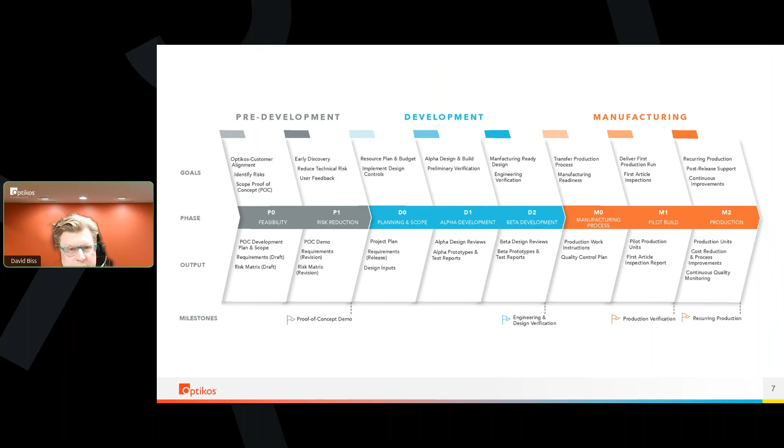So I would take this development roadmap and break it into three rough categories. In the early development, when we're developing specs, maybe doing our preliminary design: what am I going to measure during my prototyping and manufacturing?

And then when I'm doing my design work in preliminary and critical design, you want to start thinking about how am I going to measure this? What tools do I need to have on hand? What tools do I need to create?

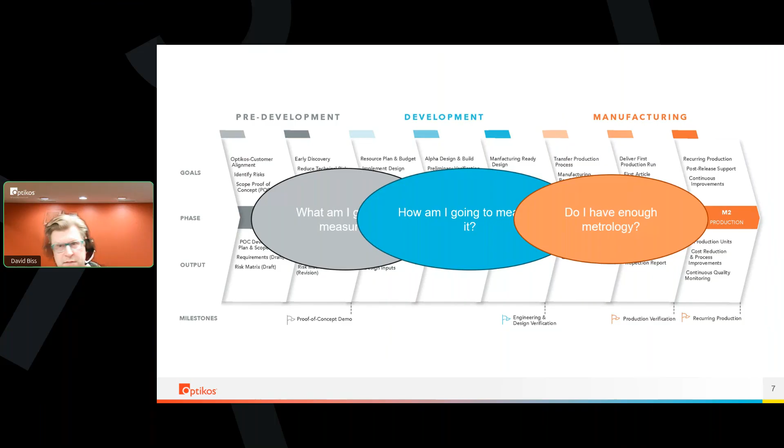And then when you make the leap from development into manufacturing, you're going to want to start thinking about, do I have enough metrology? Do I have too much? Do I have the right mix of metrology for my manufacturing process?

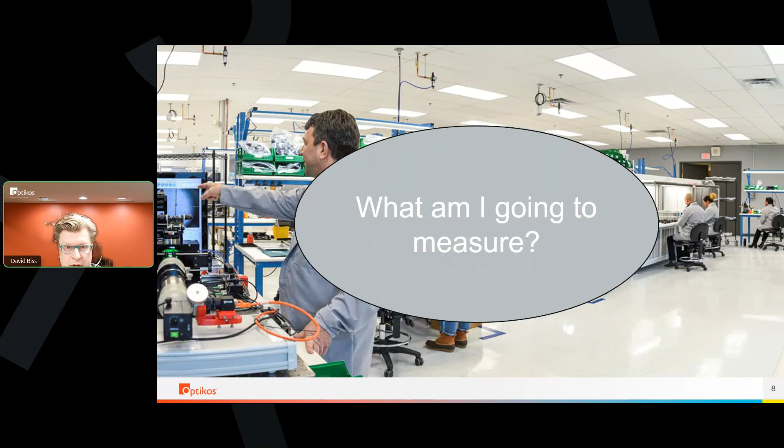Now, with that, I'd like to talk about the experience we've had at Optikos and our customers have had with what am I going to measure. I'd like to start that off with a quote, really a comment or question I had received when I was giving a talk where I had talked about determining metrics for system performance.

Someone commented that we've run into a problem multiple times where we'll build an optical system, we've done all our development, we'll test the system, and we'll find out the performance is lousy. Then you have to go through a lot of pain and do a lot of troubleshooting.

They figure out that a subassembly in their system, about which they had made a lot of assumptions, and in some cases it makes sense to make those assumptions, they assumed it should perform at some level, and it turns out that it doesn't perform at all to the level they were expecting. And so that ties into what should I measure? Clearly in the case of this quote, they should have considered measuring this subassembly in the system.

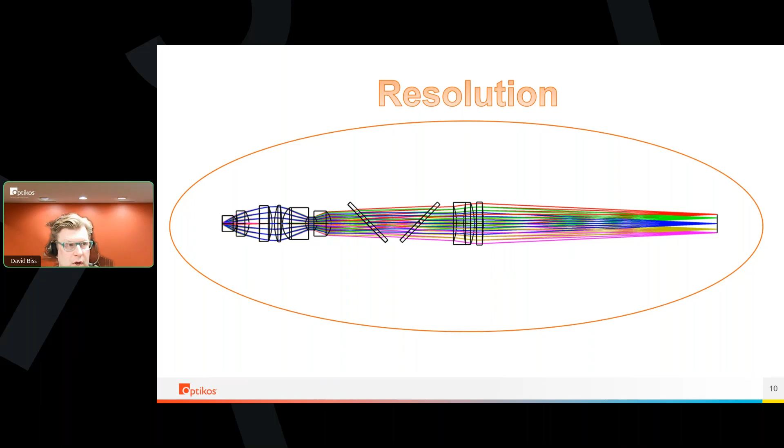I could take an example of just a simple microscope lens design that I have up on the screen here. I think everybody would agree that for a lot of microscopy applications, resolution is the key thing people are interested in. How well can you resolve these small features? But leading up to this final test of resolution in the system, you're also going to want to consider testing other parts of this assembly.

You may want to think about, well, how am I going to test this objective? Or what about the microscope objective would I want to test? Do I want to look at wavefront? Do I want to look at MTF? Do I want to look at some other parameter, field of view, focal length? There's transmission. There's a lot of different parameters you can think of.

And along with that, you can also look at the tube lens. If you have an objective tube lens pair in your microscope, you're going to ask a lot of the same questions.

Do I want to measure wavefront? Do I want to measure MTF, transmission, other things? And then other components in the optical assembly, you're going to say, if I have beam splitters or dichroics in the path, do I want to look at the transmitted or reflected wavefront of these guys? Do I want to look at spectral transmission to make sure the right spectrum is passing through the system?

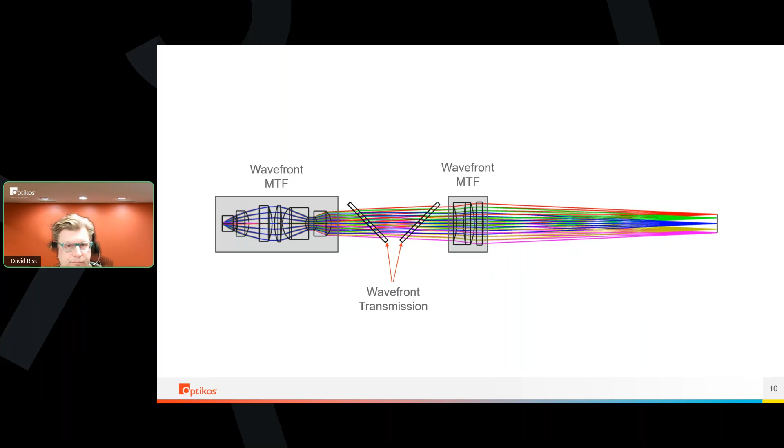Now, if we want to think generally about what I'm specifically going to measure in an optical system, I think there's two ways to look at it. There's a very straightforward, simple set of metrics or specifications or things about the system that you would want to measure. And then there's another layer that's a little more complex in terms of looking at system metrology or subassembly metrology or component metrology.

When we think of what I'm going to call simple metrology of a system, if you had a lens assembly and all the parts in front of you on a table and you say, hey, what metrology are we going to do? I think this is the first thing everybody would think about. We have mechanical components, so we can measure the mechanical dimensions of cells or barrels or retainers or the fit of the retainer. And if we have lenses, let's think about the center thickness, the clear aperture diameter, the radii of curvature or surface irregularity.

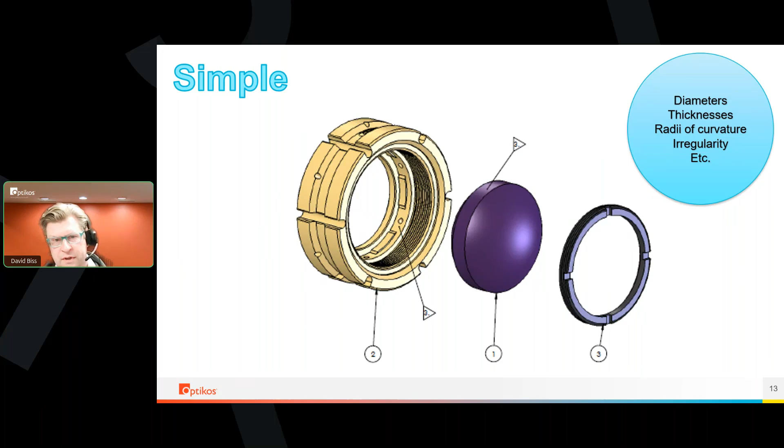And those are all valid things. You want to do incoming inspection. You do want to measure these different components. If we take it a step further and think about a more complicated second layer of metrology, if I take these individual piece parts and put them into an assembly, we want to start measuring those subassemblies to verify that those components are actually assembled correctly.

So we start to think about subassembly performance, and this would be in the case of what I was showing a few slides earlier. You're talking about your objectives or your tube lenses, and with that it becomes a little more difficult to say, what do I need from these different components to achieve the performance at the end of the line? In terms of the microscope, what kind of wavefront performance do I need from my objective to achieve the resolution that I expect?

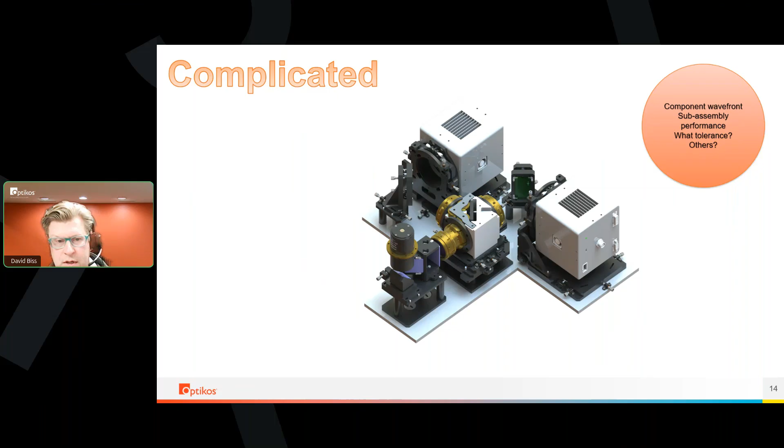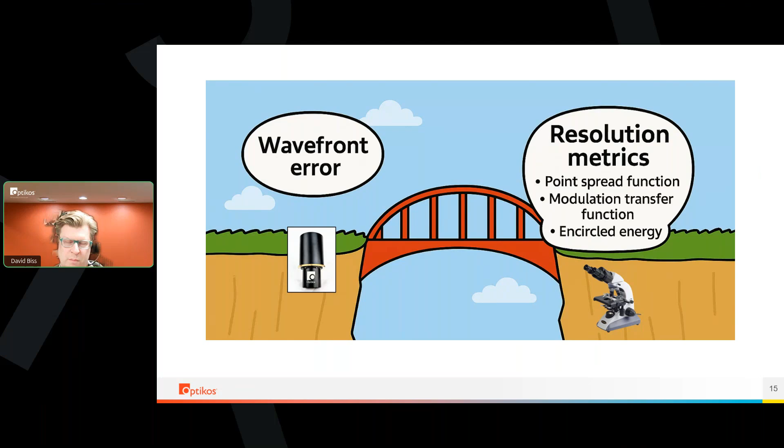There's sort of a separation, I'd say, between this component wavefront error and resolution metrics. I'm keeping with this microscopy theme, but it can be applied to optical imaging applications and other applications. If you're just delivering light in an optical system, there's analogs. We have our end system metrics, but then we want to know what performance we need out of these different components.

We want a nice high resolution image, or it doesn't have to be high resolution. It just needs to be achieved against whatever your imaging criteria is supposed to be for your system. What kind of wavefront error do we need from an objective, and how do we bridge this gap?

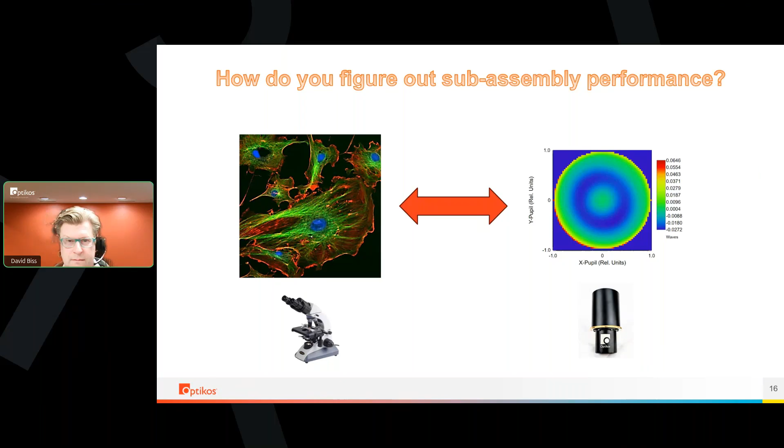So when we're thinking about metrology, we need to come up with these answers, because if we're going to measure a subassembly, we want to know, if I measure 10 waves, is that good or bad for the objective? Or do I need to measure a tenth wave of peak-to-valley wavefront error? And you can do that during a design phase by coming up with a tolerance analysis to bridge this gap.

You sort of feed in your nominal design, you have your tolerances of all your piece parts, and the tolerance analysis generally takes all that and perturbs the optical design to generate a statistically significant amount of Monte Carlo trials. And then you can look at those outputs and say, oh, great. Now I have a relationship, and that's what that plot on the right is, the output. It's a representation of all these Monte Carlo trials. You have a relationship between your full system performance and your subassembly wavefront error.

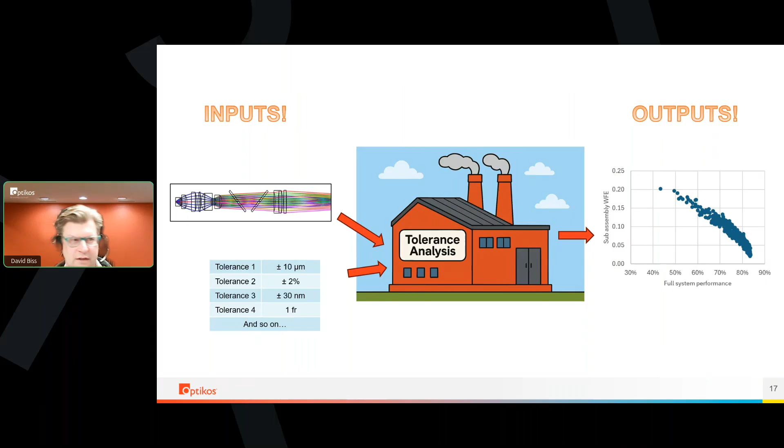And so you can take that and start to use that to come up with performance targets for your metrology system when you're doing your design, because you don't want to be at the end of your development and say, okay, well, my system doesn't pass, and then you start measuring things and you're like, well, I don't know, this tube lens has this wavefront error. Oh, now I need to go do that analysis and figure out what it was. You want to do it back in the beginning when you're doing the development, because you can also feed that back into the development to help you design better.

But data like this helps provide in-process performance targets to help you build confidence that when you build these components and you get to the end of your assembly, you're going to have a performing system. Also, in a production setting, or when you're doing prototyping, if you start measuring something and you see it doesn't pass, it's not meeting the specification, you can halt your process right there before you get to the end of the road and say, hey, there's something wrong with this component.

Either there was an error in the assembly, or there's a non-conforming part that maybe you missed in an inspection step, or maybe you didn't consider measuring that because you had high confidence that that performance spec was going to be achieved in inspection. So this data can help you catch those things early in the build process, or at a point in the build process where it doesn't affect the end result, and will result in saving you time and money. It also gives you the chance to rework components and feed them back in so that you build a system that will perform to your expectation at the end of the build.

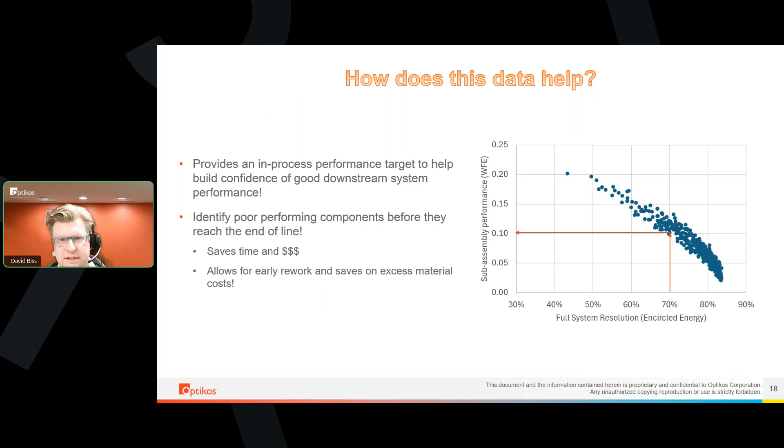So if we're thinking about this, what am I going to measure? And we're thinking about metric targets for metrology. You want to do that in early development phases. You want to do that because it helps you determine what tools you might need, but it also helps you build this metrology foundation that'll support a well-performing system at the end.

When you think about metrology early on, you can immediately think of, okay, well, I'm going to measure piece part components, and I'll measure mechanical dimensions or lens parameters of an assembly. And that is something you absolutely should do at an incoming inspection. But it may not be as obvious that, if you're building subassemblies, if you have an optical relay in the system, you will want to figure out what about that relay is worth measuring so that you can yield an appropriately performing product or prototype at the end of your build phase.

And in the design phase, you can leverage the design and modeling work to answer those questions, figure out what metrics you're looking to achieve when you do your metrology during your prototyping phase. And specifically, tolerancing analysis is one example of something that can bridge that gap between final system performance and looking at design files and say, okay, I know that for this statistical ensemble of systems that have this kind of performance, I need this kind of performance from your subassembly.

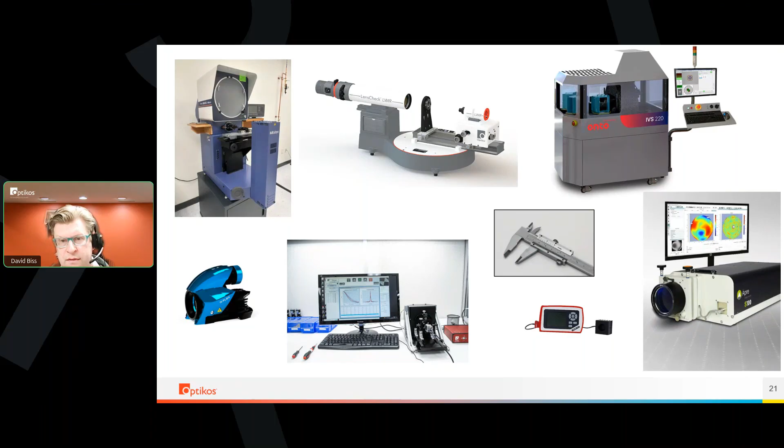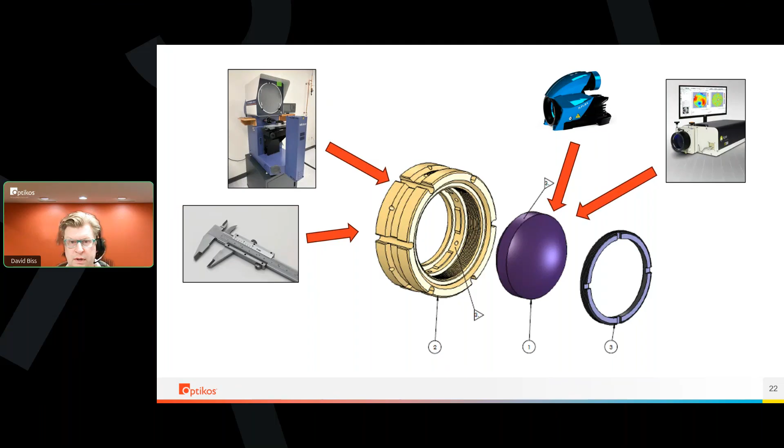Because you can do a lot with these kinds of off-the-shelf things, and you can do a lot of component measurement in a straightforward manner. But once you get past component measurement, when you get to your subassembly, you can do some analysis or some metrology on it with off-the-shelf tools. But if you're talking about subsystems or other things, you may not have a tool that measures what you're looking for very well.

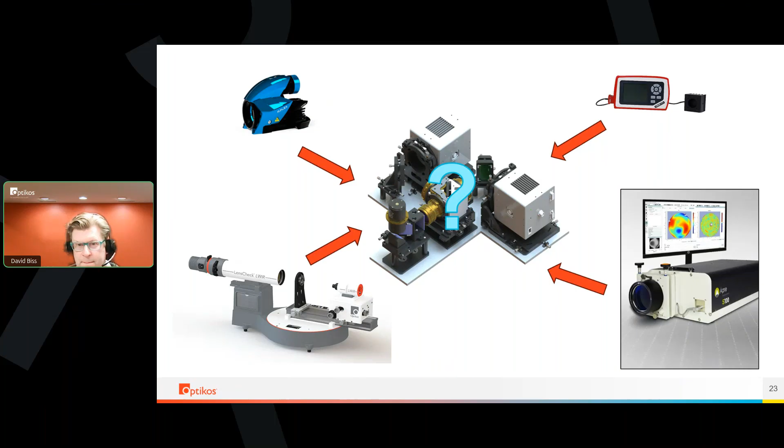And we have boatloads of fixtures that we have designed over the years and had made to test all sorts of different kinds of lenses. And I think it's important to think about fixturing when you're in your design phase, because thinking about how you're going to hold something, or what you need to do to your optical assembly to be able to hold it when you're doing your test, is very important.

It's horrible to get to the end of your development where you're in your prototyping phase and you're testing something and you haven't really thought about your fixturing, and maybe you have a small lens assembly and you're messing around with a 3-jaw chuck, trying to mount something in front of an interferometer, and you find out you don't have the right degrees of freedom to align something, and then all of a sudden you've got to go back and wait and design something. You're losing time, you're losing money.

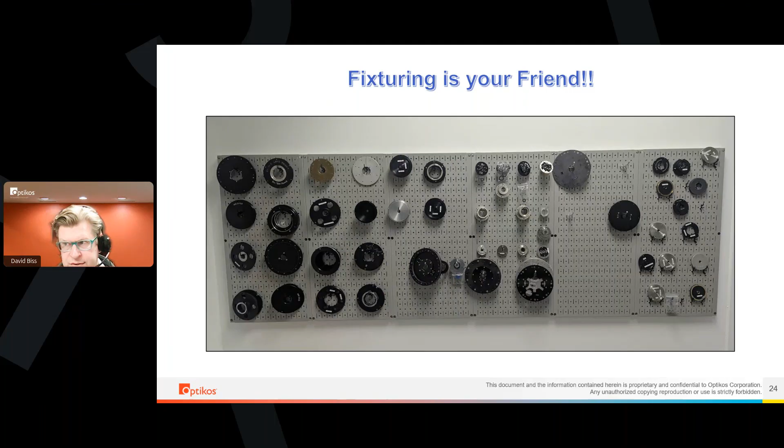And along those lines, often you can have interferometry, wavefront sensors, and other off-the-shelf metrology tooling, MTF benches and things like that, to measure components. But in the years that I've been in the business and thinking about metrology, almost always a lot of applications end up coming up with some form of custom metrology setup.

Now, many of these custom metrology setups may implement off-the-shelf components, but you want to give careful forethought to developing metrology tools during your design phase, because in the end it's going to save you so much time, make your life easier, and really speed the process when you're doing testing. And so I want to show a couple of examples of what I'm talking about.

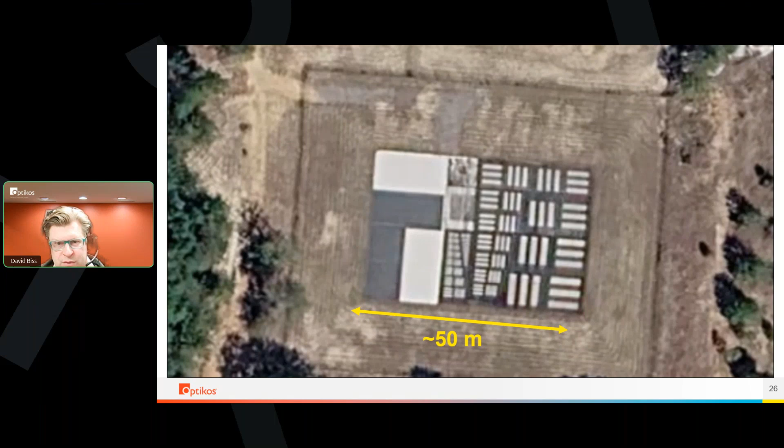But maybe there's a case in which that doesn't really work for your form factor. You can be testing a camera, and maybe you have an aerial imaging system. That's just a generic camera clip art that I have on here, but let's pretend it's a really fancy aerial imaging system. And you want to test in the factory. This is a case where you're going to need potentially some sort of custom metrology to do that. You could use an MTF bench, but maybe you want to have something that allows you to take a robust data set in one snapshot.

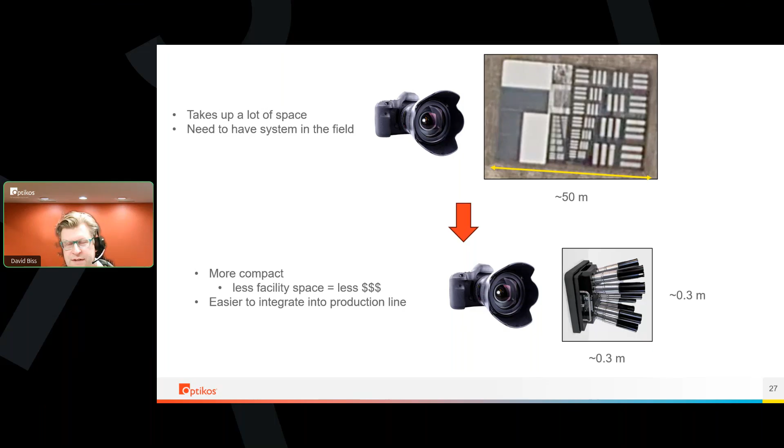And so what you could think of is, let's consider a multi-collimator projection system. Now, this happens to be something that we sell as a product, but the idea is that, depending on the constraints in your system, you might want to design something that's a series of collimators to project a series of targets across a full field of view into your camera.

And in a production setting, this is absolutely what you'd want. It's more compact, takes up less space. It takes up less facility space, so you don't have to pay for the overhead on rent for that area. And it'd be hard to integrate something into a production line that is some gigantic target. It's easier to make some sort of really small assembly. And so this is a situation where custom metrology can save you money and, in this case, I guess, space.

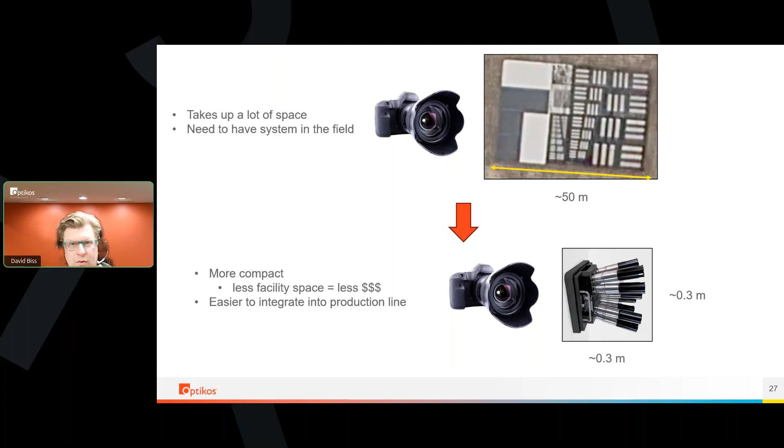Another example of a custom metrology, actually a couple versions of a custom metrology setup, is: what if you want to test something that's an underwater camera? How do you test this? I think there's a pretty quick, obvious way that I'll show in a slide, but this is born out of a project where we designed a series of underwater imaging lenses. And the first thing you think about when testing is, well, let's build a pool of some sort and put some targets in there at the right conjugate distance.

And we can do that, and you can measure resolution in the environment that the camera is supposed to be used. And so you can see a little bit of the camera in there. But, you know, it's a big tub of water. That's not great if you are requiring an alignment step of your lens assembly or lens to camera alignment, or you need to do 100% inspection of your camera assembly. A gigantic pool in your factory, well, it's not gigantic, but it's definitely pretty big for what anybody would probably expect in a manufacturing environment, doesn't seem like the greatest idea.

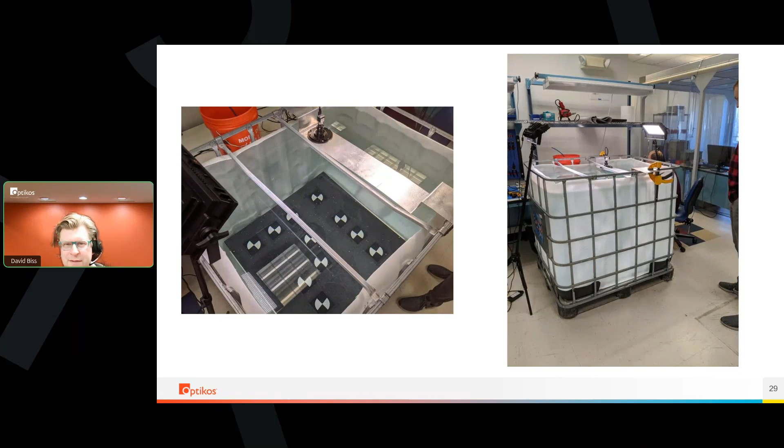And so you'd want to think about, well, can I do something during my design phase to come up with something that's more friendly for a manufacturing environment? And that's exactly what we did. Now, during prototyping and the development, we did both of these, but it's sort of a stepping stone from the water bath pool test to this sort of fully in-air test.

We were able to develop a test fixture that basically fit on a tabletop and took up a lot less space. I say easier to use because you didn't have to maintain the water in a water bath over time, or drain all the water and then pour water back in every time you wanted to do a test. And it also had a much lower risk of flood, which, when I think of something like that, is always when I'm thinking of catastrophe: am I going to flood my lab space? That'd be horrible.

So you want to think about this during the design phase. You don't want to sort of tack it on at the end and say, oh no, we got to create a pool, or oh no, this isn't going to work because we can't have a pool. We need to come up with a sort of in-air equivalent test of this system to make it work.

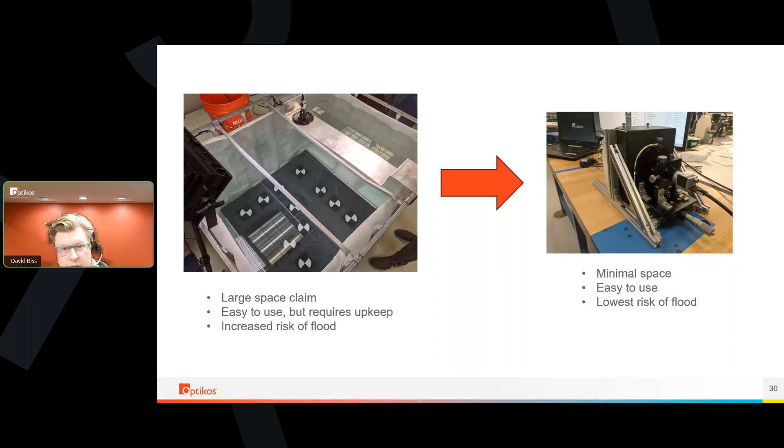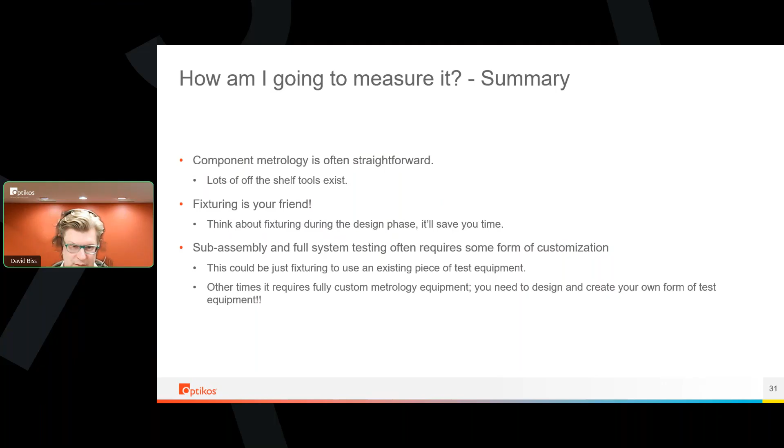So if we're going to talk about what am I going to measure, or how am I going to measure different metrics that we've figured out during our early design process, component metrology is pretty straightforward. A lot of off-the-shelf tools exist. You do always want to think about fixturing up front. Otherwise, you're going to lose a lot of time trying to cobble something together that maybe doesn't have the right degrees of freedom, and then it's just a mess, and all of a sudden it's leaking into how good your measurement is. You want to design those things as early as possible, or when it's reasonable.

And then for your subassembly and full system testing, often there's going to be some form of customization. If you have an aerial imaging system and you want to project a bunch of targets into it to do a full field test, you might need to come up with some custom collimator assembly, or you can come to us. Or maybe you have an interferometer, but you have a folded system, and so you're going to need to come up with a set of tooling to hold your system, and then hold your reference sphere, or your reference flat, to do your interferometry correctly. And you want to be thinking about this as you're designing your system.

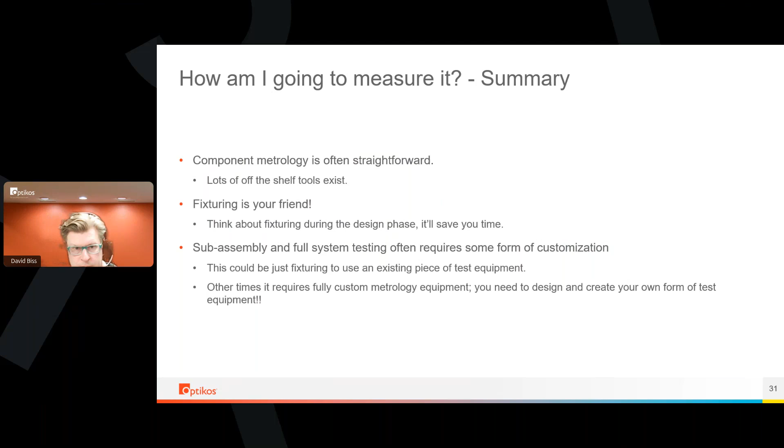Now, let's say you've done all this metrology, and I do want to bring this up, and you still end up with an underperforming system. You've done your design work, you've run your project, you've done all this great metrology, and then at the end you get your prototype together, you do a measurement, and it doesn't meet the performance you expect. Your manager is going to come to you and start hollering at you. We paid for all this metrology. You did all this in the development, and now it doesn't work. It's useless. And I'd argue, until you've experienced this a few times, you're still better off than if you'd done little to no metrology.

And that's because, hypothetically, let's say we have some system that we've created and it has 10 parameters, and you knew about 9 of those parameters, and you've done metrology on those 9 parameters because you have a robust metrology plan. All of a sudden you can look at those 9 things and you immediately know from your design, oh, these were all in spec. These are things that aren't contributing to the problem. And then you are just left to figure out what is that 10th parameter. If you had done little to no metrology, you could be doing, in this example, 10 times more work to figure out what's wrong with it.

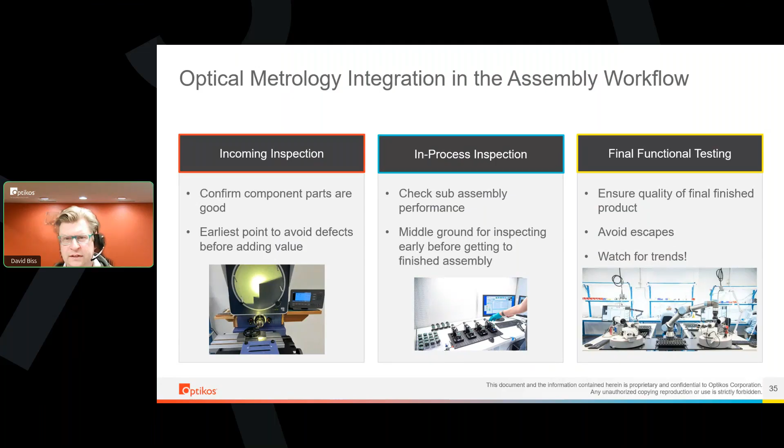And so in a manufacturing setting, it's a lot of the same story, same themes. By having a robust metrology plan and the right metrology mix, you're going to catch issues early and identify issues to help keep you on schedule. You're going to provide more consistent performance. If you have a lot of variability in your process, you may have a lot of fallout or loss, and that translates to cost. And so by having good metrology, you can minimize scrap in your system, or you can minimize losses in your production cycle, and then you maintain quality.

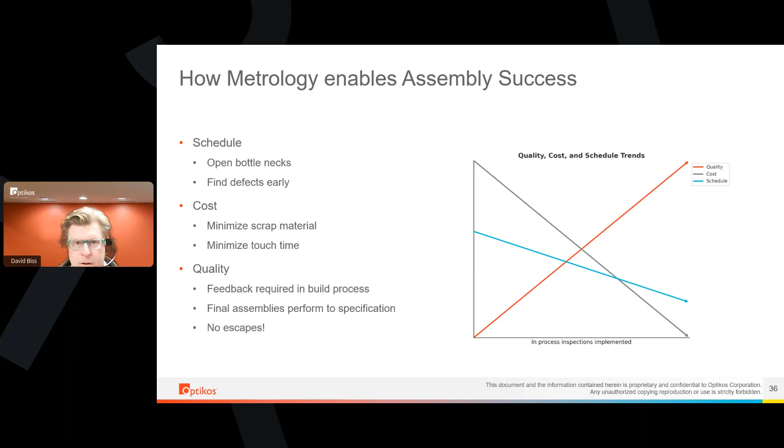You have consistent product that's going out that has the same sort of performance, and that speaks to, you don't want to have poor quality product. You want to have metrology that tells you that what you're sending out the door is the right thing for your customer. So here's just a brief summary that is pulled out for manufacturing. It's the same thing. You want to implement inspection steps. You want to make sure that you have the right inspection metrology, and there's different devices that you can use for optical metrology in manufacturing. You want to pick the right ones for your needs. And I really strongly suggest watching that webinar, because there's lots of good stuff there that I would have certainly run out of time to talk about in this webinar.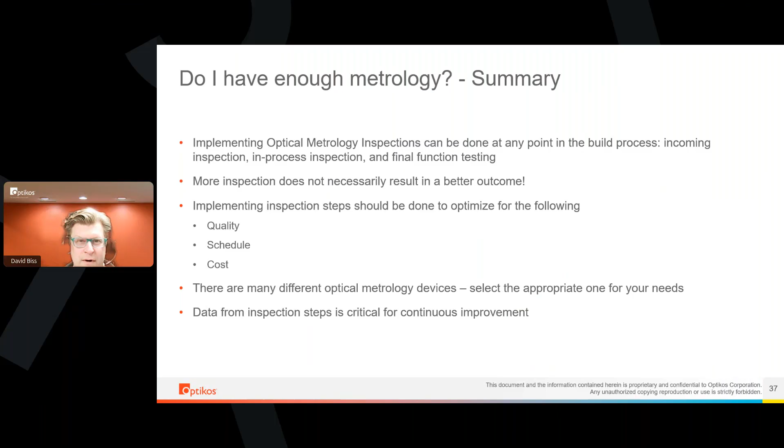So, in summary, if we think about the three questions posed in the beginning about what should I measure, how should I measure it, and do I have enough metrology? Early design phase, you want to think about what parameters should I be measuring. This helps tell you what tooling you're going to need. But you also want to think about, in process, what in-process steps, what sub-assemblies you want to test in your build cycle of either your prototypes or your manufacturing, because you want to build, think of the house analogy again, these building blocks of metrology that ensure that in the end your product is performing the way that you need it.

How you should measure it is all about picking the right metrology tools. In the end, there's a lot of existing metrology tools that are going to be obvious to people that you're going to need to measure different component specifications or even sub-assembly specifications. But at some point, you're going to most likely need to do some customization depending on what your application is.

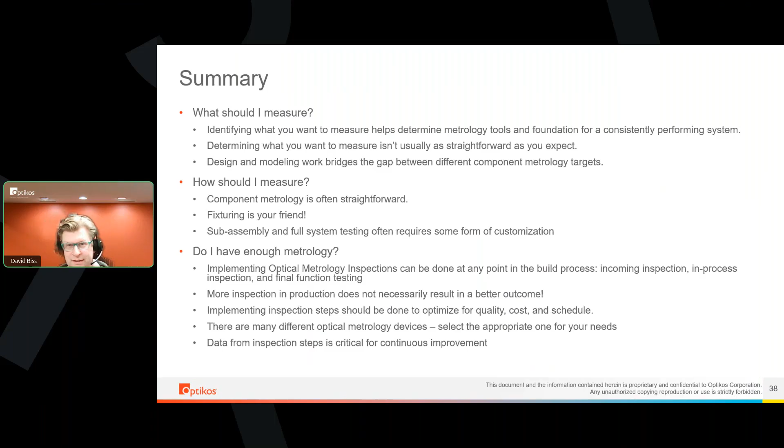You're going to need to tailor the metrology to match what you are designing. You don't want the metrology tool to determine how you're going to design your system. And then when you get into your production cycle, you need to think about the kinds of metrology you want to implement through your manufacturing cycle to ensure that you have the best outcome for your production cycle, so you can track fallout, you can track trends in your performance, you can catch issues early in the production phase instead of at the very end, because if you catch them at the very end, that's when you're going to lose the most money in terms of your manufacturing cycle.

So I want to circle back to this. The bottom line is really a metrology mindset is going to save your project. And you are going to eliminate confusion during your development, prototyping, and build processes. You're going to get consistent outcomes for your prototype builds and production. Both of those things are going to lead to less downtime, and less downtime or less time troubleshooting means you're going to save money. And who doesn't want to save money during your development? More budget is great, or recovering budget is absolutely wonderful.